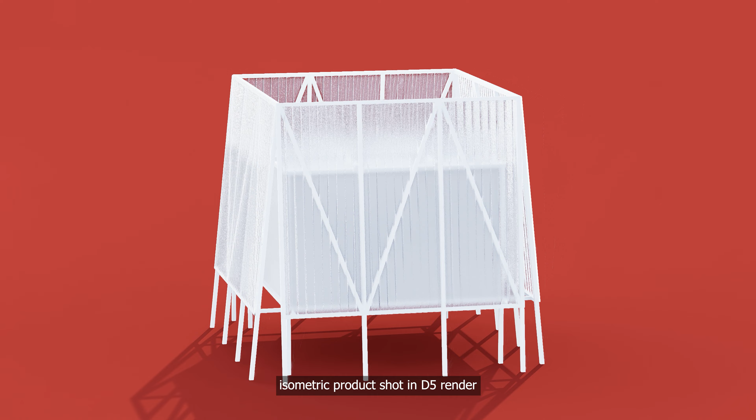Everyone, welcome back. Today we'll render a clean isometric product shot in D5 Render, focusing on translucent polycarbonate material. I've placed this 3D model and set the scene with lighting.

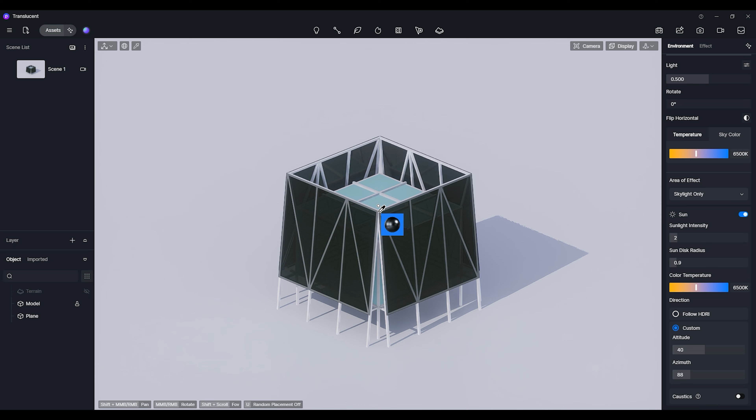Let's start with the metal structure. I'm looking for a white powder-coated finish. Let's modify this material.

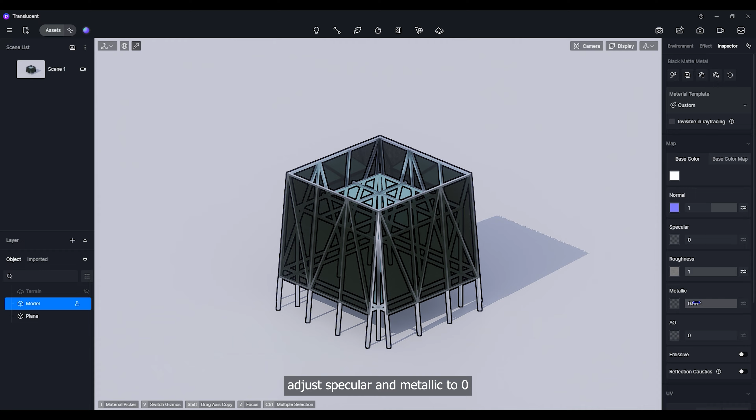Adjust specular and metallic to 0. Avoid reflection. Change the background color to bright red.

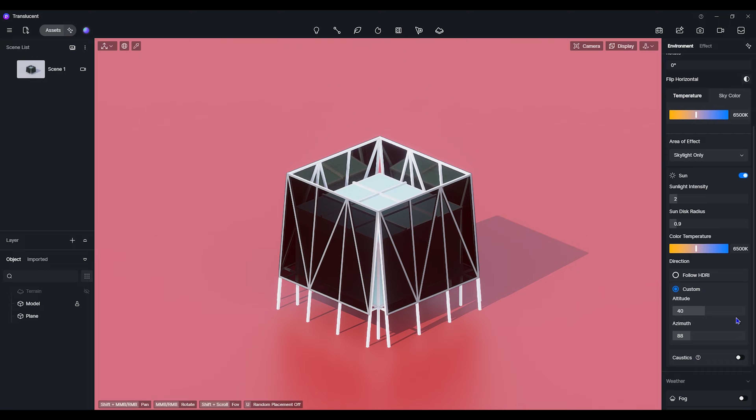The model pops up. Increase roughness. Avoid white background, it kills depth.

Apply white to the inner box. Limit color bleeding for all the materials.

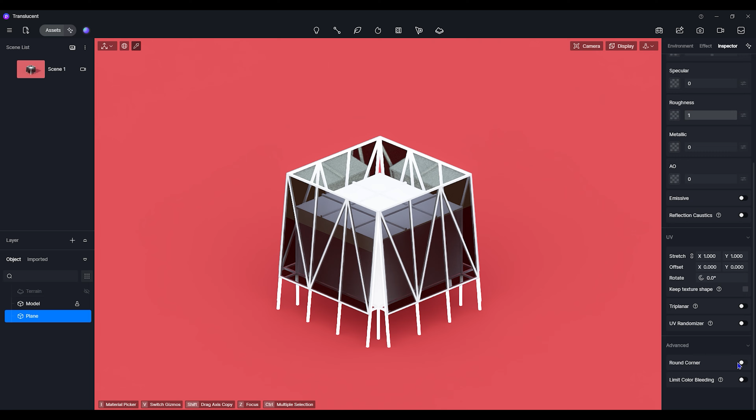Now let's get to the polycarbonate sheet. After applying the material, adjust specular and opacity. Set opacity to 0.11 and refraction to 1.5.

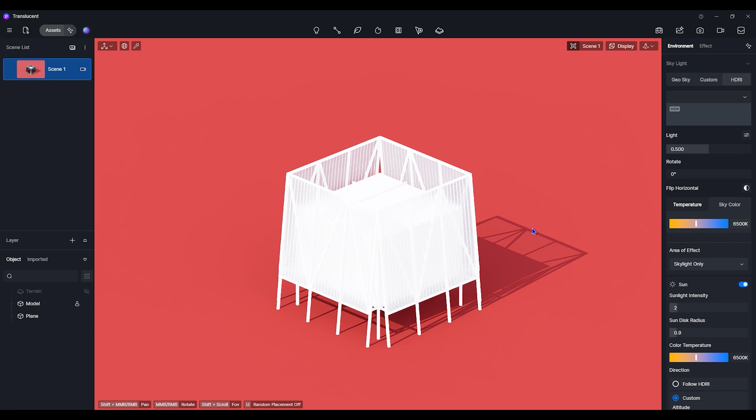Polycarbonate is not fully transparent like glass. It is translucent. It lets light pass through but diffuses it with a soft glow. Try out different colors, add shadows, and keep a clean background.

And that's it. You've created a clean isometric model with realistic polycarbonate. Thanks for watching.